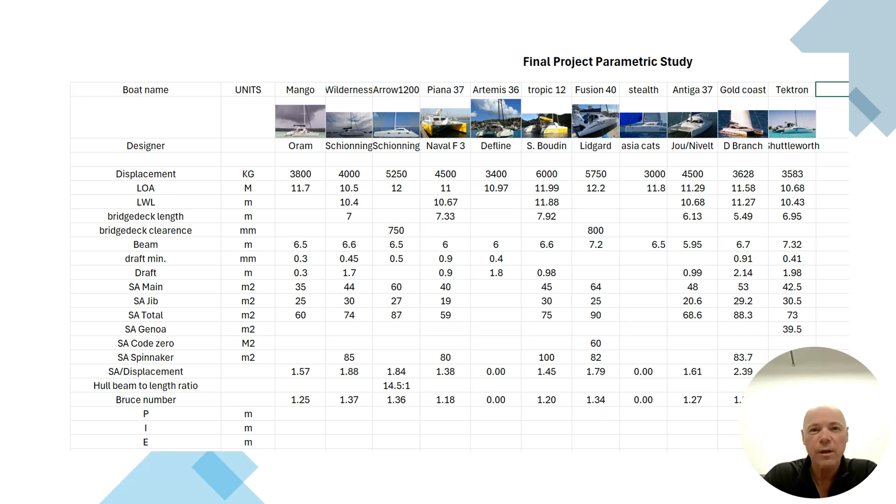I looked at a lot of different layouts and solutions to make the best use of space available. I settled on bow bunks across the boat being the best option, and with two aft cabins. Other cabin layouts could be used as requirements dictate.

I wanted to achieve the potential for four cabins and produced these initial sketches for the proposed layout. The result of the layout is that I'm able to keep the hulls quite narrow, which means good performance could be possible with a high length to beam ratio.

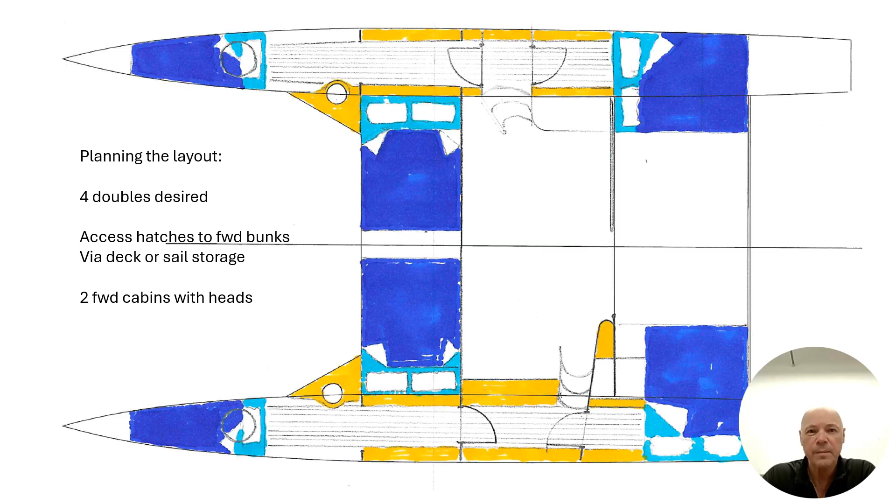One of the big design issues was to create enough space for the saloon seating and a large enough double bunk in the forward cabins. And I looked at different layouts of this and came up with some solutions. I achieved the final layout by posting the foot of the bunk underneath the saloon seating.

Another design feature shown here is the forward-facing hatches, which can be open and act as ventilation for the forward cabin. This doubles as a hatch for the storage lockers.

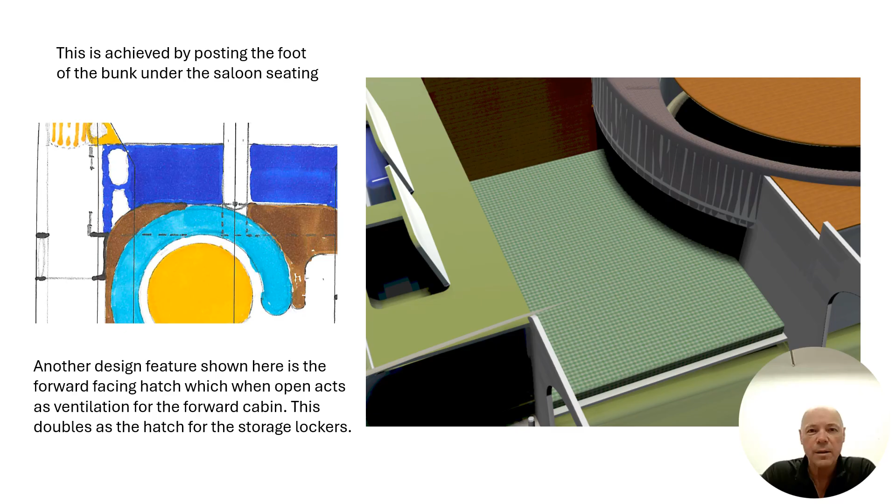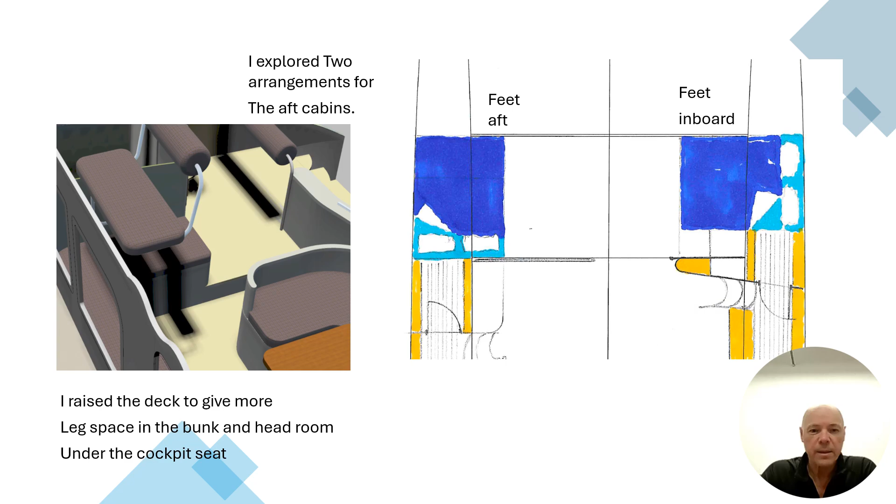I explored two arrangements for the aft cabins. I chose a feet aft layout, which allows for better cockpit space, and another advantage that I will set out shortly. I raised the deck to give more leg space in the bunk and headroom under the cockpit seat.

This layout means that the heads are accessed through the forward cabins, so I needed to find an extra space for a head that would serve the aft cabins, and this could be easily accessed during the day without going through the forward cabins.

This shows the final layout, fitting the aft head into a slight reduction in the saloon seating, but it did give extra space in the port aft cabin. And this layout allows for a good balance between the two.

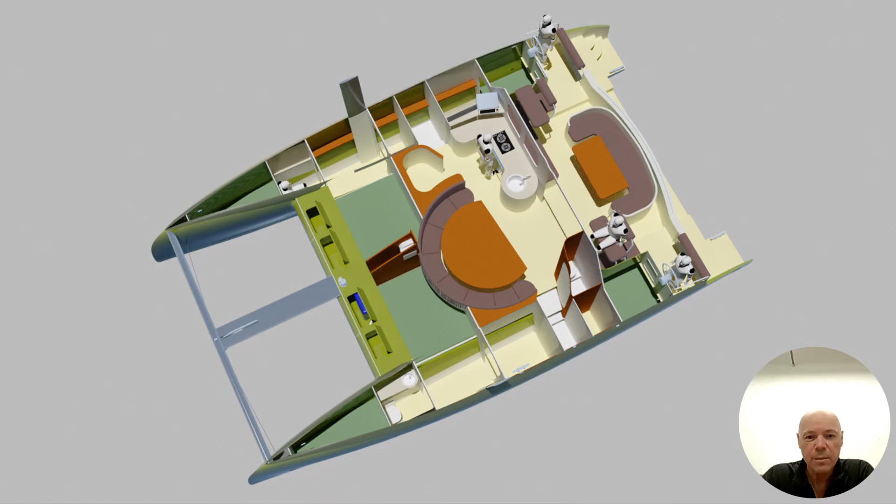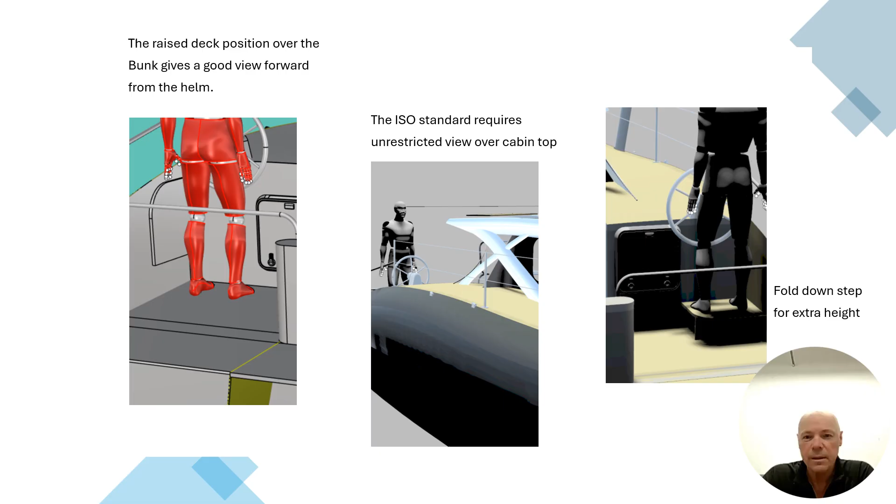Here you can see the raised deck position, which gives good forward viewing from the helm. The ISO standard requires the unrestricted view over the cabin top for multi-hulls, and there's also a fold down step added for extra.

I also designed in the option of a protected internal steering position with a sliding hatch, which could be fitted with a screen or a spray hood if necessary.

Looking at similarly designed catamarans, there seem to be very few strong ideas for the cabin top. They just appeared like a pudding dropped on top. So I wanted to add something that was a bit more distinctive in design. And many had added cockpit protection as an afterthought.

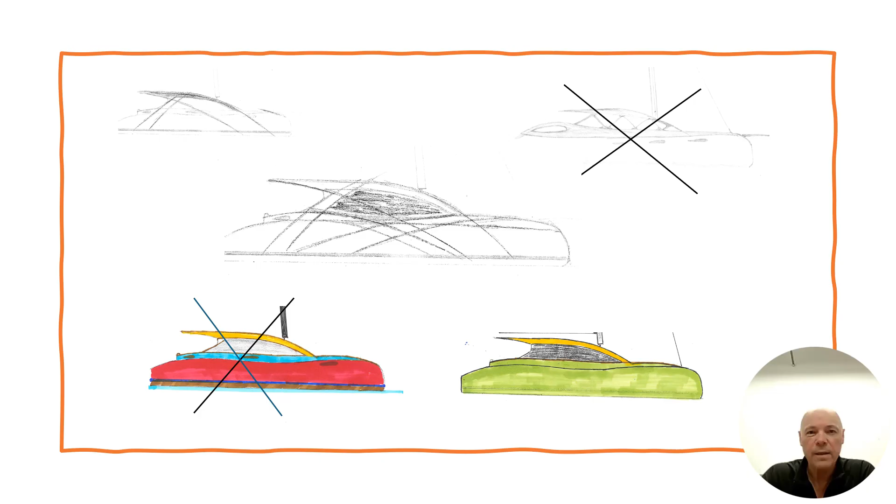These are some of my initial sketches on the elements of flow and styling I was influenced by for the coach roof styling. You can see elements of the curving lines influencing the shape. I had to discount a few ideas, and

from the initial ideas I progressed this design and wanted to achieve these flowing lines in the coach roof, and to accentuate the kind of flow and slipstream of the roof line.

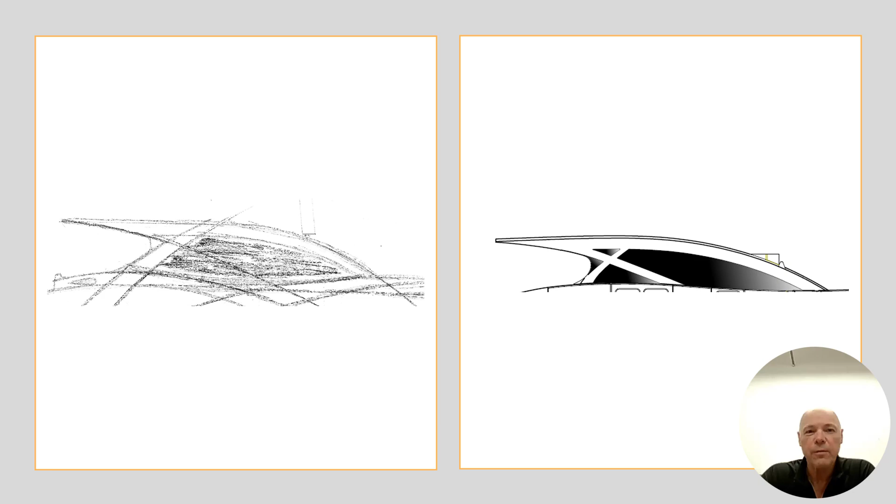I decided to accent the roof line using a sort of strong tubular-like form and shape. And this would help reduce the impact of the large windows and the roof. And it would give a strong differentiation between the hull and the coach roof. I was pleased with the final outcome.

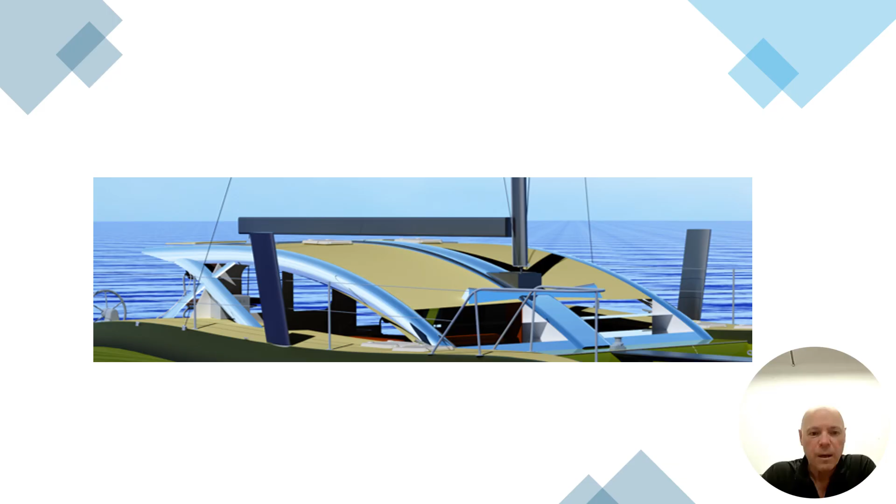The tubular shapes could be finished in different finishes, like carbon or any colour of the client's choosing, so they could accent their own style on the boat with contrasting roof sections. The saloon will be light and airy with good visibility.

I decided to reduce the impact of the high topsides by creating a separate surface between the topside and the deck. This is a separate surface, not just a split in the surface, and it is designed with its own shape. It reduces the visual height of the topsides, making the boat feel longer.

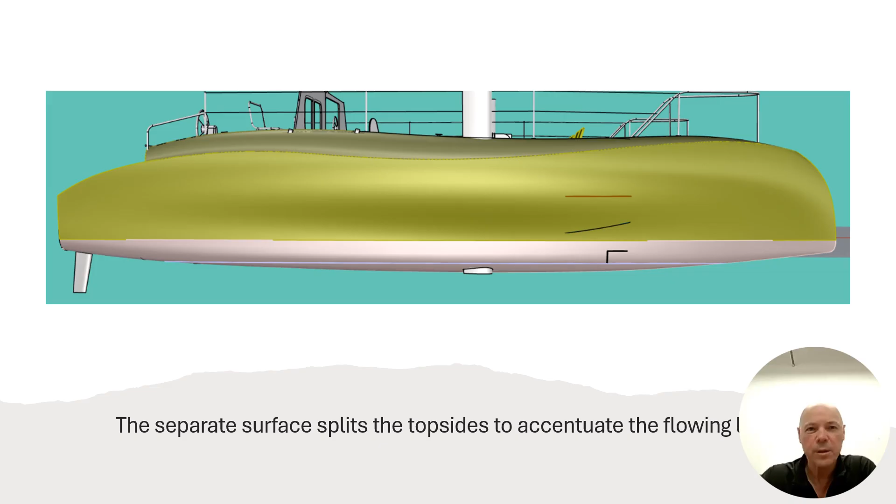But unfortunately, it has created problems trying to create the shape. And my biggest problem with the whole project was trying to maintain the top shape between the different surfaces that I'd designed and joining them together.

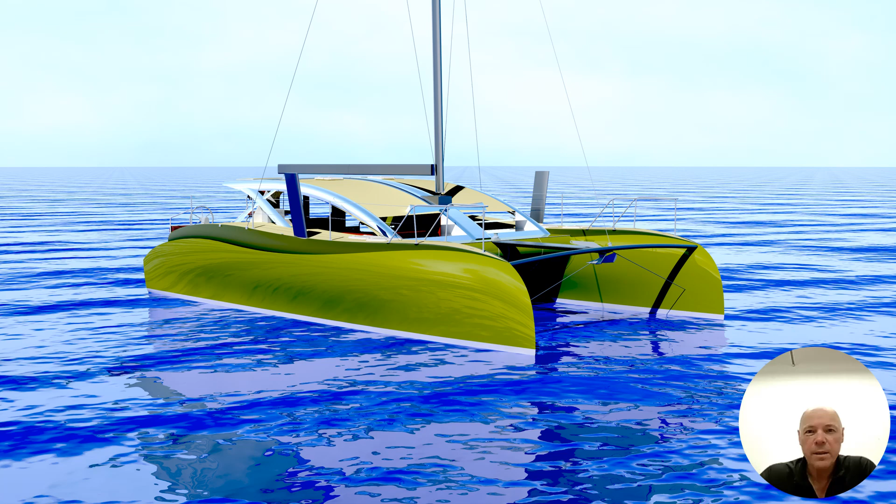The final overall effect is to accentuate the lines further and to give the boat more shape and to complement its sporty appeal and to give a flowing and interesting look to the boat. The end result is a sporty looking catamaran with plenty of space and accommodation inside and out, and hopefully performance to match.